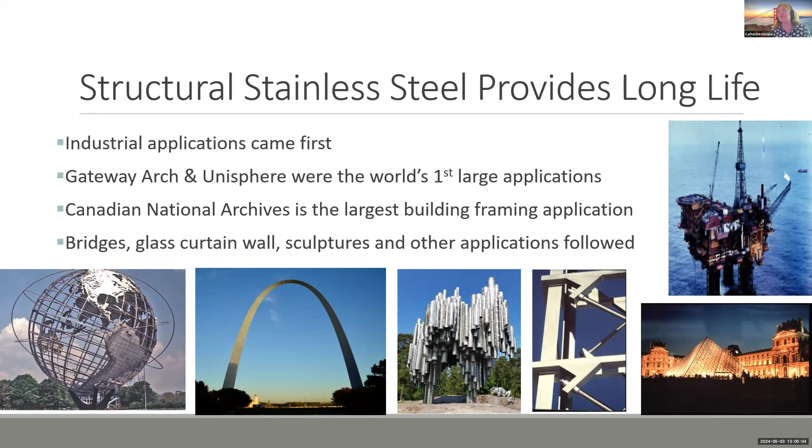Then the Canadian National Archives were built, and they were the largest building framing application in the world using structural stainless steel. Not that there aren't others—there have been many different applications for structural stainless steel. I'm showing a few, and they provide well-documented long life.

These are the documents we're talking about today. We started with Design Guide 27 from AISC. There's now a new version of it out. Once that was out, work began on the AISC specification for structural stainless steel in buildings and the Code of Standard Practice.

Simultaneously, the AISC/ASCE 8 committee was organized. I was involved in all of these things. I should mention that with ASCE 8, it had been 20 years since it was updated. It's been in the International Building Code since it was started, but it hadn't been touched. All of these now contain information about designing with duplex and highly alloyed austenitic stainless steels, in addition to the common stainless steels. Michael, as chair of AISC 313, is going to talk a bit more about that experience.

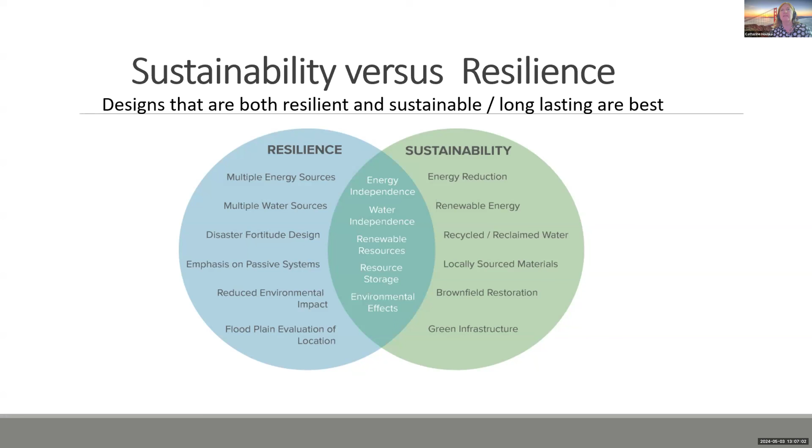I wanted to give you a bit of an overview as to why we're talking about sustainability and resilience. I'm very involved in ISO and ASTM sustainability and resilience standards. ASTM happens to be a bit ahead, but our government agencies and others around the world are all saying that we need both if we're going to reduce the carbon footprint and achieve our sustainability goals.

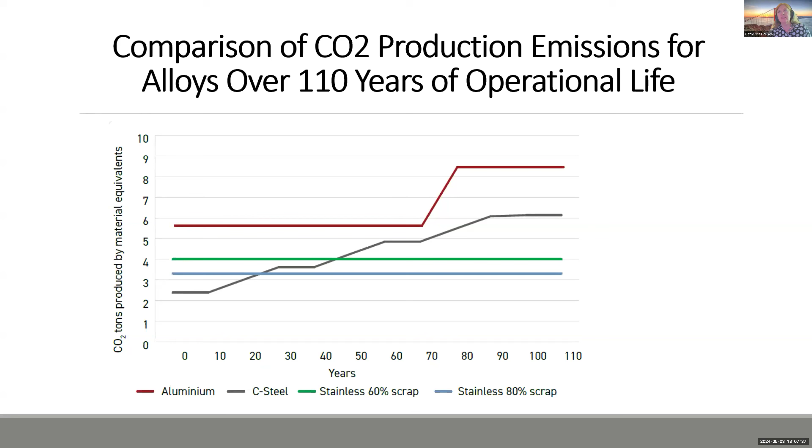If you look at 100-year projects or longer and consider material deterioration, replacement, and repair, there are significant differences between materials. When you have to do maintenance, there's an environmental impact. If you have replacements, there's an environmental impact, and all of that has to be considered in life cycle assessments. When it is, stainless steel has a clear advantage.

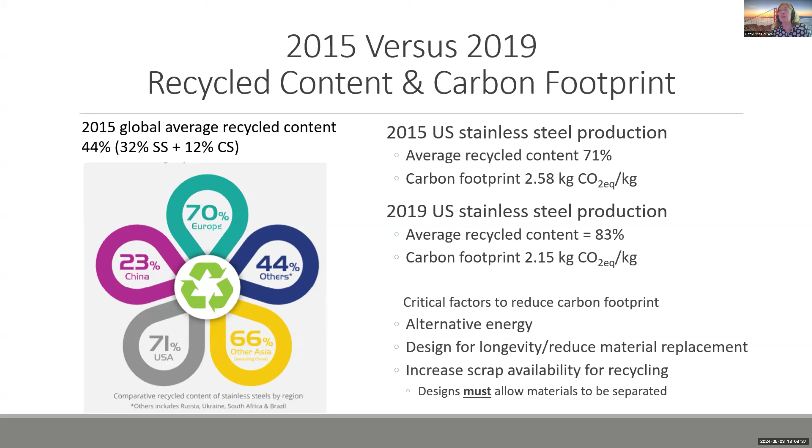It's also important to point out that there has been ongoing research globally on the recycled content of stainless steels. There's published data out there from World Stainless—I'm showing the 2015 global numbers. There is a difference between those numbers and the US-specific stainless steel production data. I've shown carbon footprint for 2015 versus 2019 to show you that there has been a significant reduction. The industry has worked very hard to reduce our carbon footprint. There are areas where we need more sources of alternative energy, for example, to help reduce it further, as well as improved scrap availability.

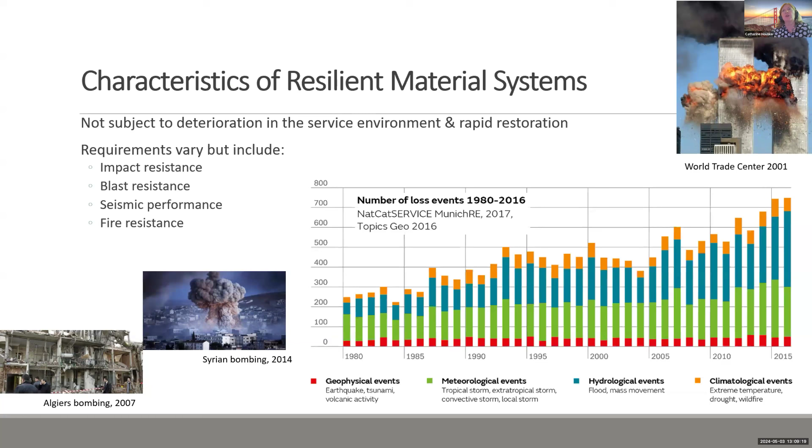We are talking about resilience tied in with sustainability, because the reality is that resilience loss events are increasing around the globe, whether human caused or natural, associated with global warming or otherwise. Stainless steel checks off all the boxes in terms of its impact and blast resistance, its energy absorption, which makes it ideal for seismic applications, and its fire resistance.

With that, I'm going to turn this over to Michael Mulhern, who's worked closely with me on AISC standards and other projects, to talk a bit about how we got here.

Thanks, Catherine. My name is Michael Mulhern. I'm president of TriPyramid Structures. For those of you who don't know us, we are a designer and manufacturer of custom architectural work around the world. Some of it's industrial, most of it's architectural. I'm going to very rapidly talk about why we have these new codes.

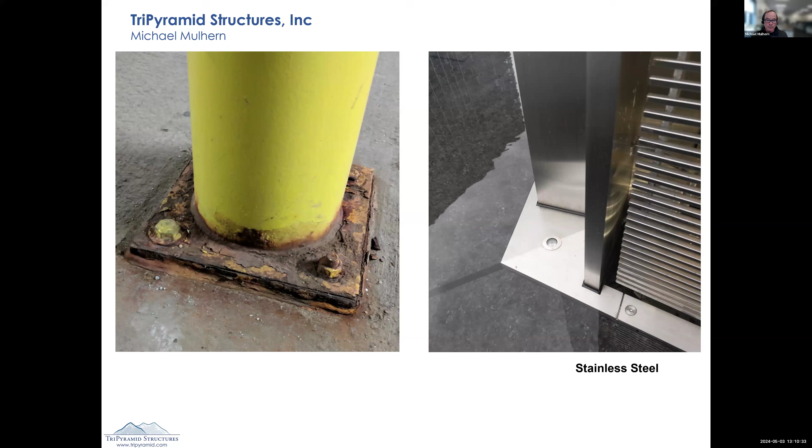The picture on the screen right now, we've all seen it in one form or another. But that column on the left, in my view, has failed. It is within about 200 yards of this tower that we built on the right-hand photograph. Now the column is somewhat older, but we know that we can do better than this in carbon steel. At the end of the day, carbon steel is going to rust and rot no matter how good a coating I put on it.

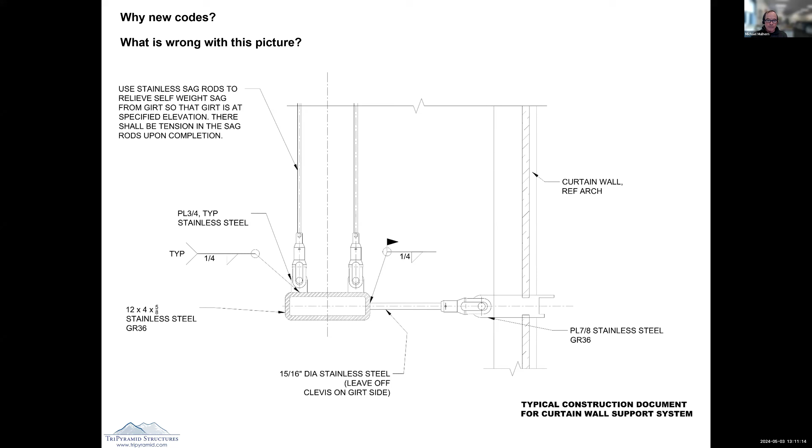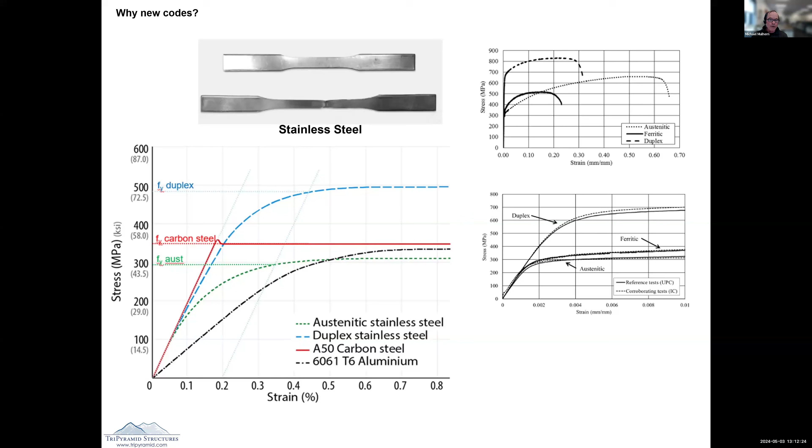Notice that the green line has got that big curve in it, and it isn't nearly as straight along what we call the elastic range. That's ductility. In the austenitic stainless steels, they're ductile — what does that mean? They stretch a lot, they move a lot. So it turns out that all these years we've been talking about using stainless steel with the same design parameters as carbon steel, it's wrong. It's wrong because the materials behave differently. That's why we have the new standards. A lot of it is the same, but some of it's real different, and some of the equations are real different.

So as a quick introduction — this is a talk I could give for many hours, so you're getting a very short version. First of all, what is stainless steel? It is not simply non-rusting steel. It is a different material.

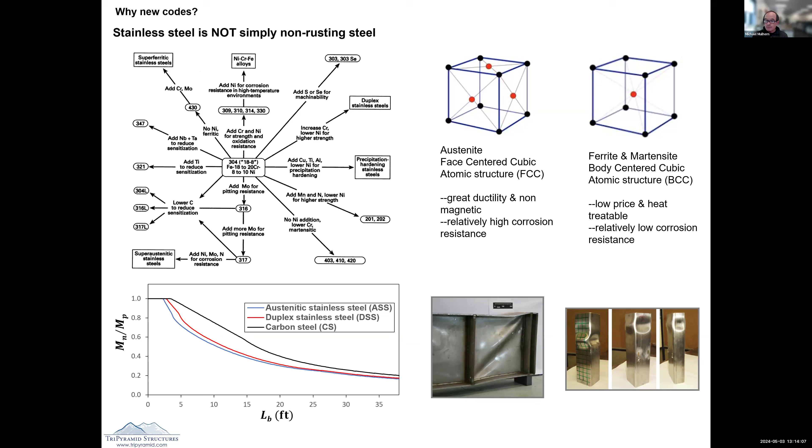This behavior that you see on the right-hand photographs is different than it is in carbon steel. The graph on the left illustrates that graphically. The black line shows how carbon steel behaves, and you'll see that the stainless steels, both the duplex, the red line, and the austenitic, are real different. So, a long way around, they're not the same.

And that's why we have new codes. The other piece of this new code network is that there are plus or minus 300 stainless steel alloy grades available commercially. The Outokumpu guide is, you know, it's thick, and there's all these tables about what stainless steels are available. For a designer, this is incredibly intimidating.

And what they don't tell you when you leave school is that most of these are not available to us. If you want to order a mill run, they're available, but for the most part there are very few stainless steel alloys that get used all the time and are available in a number of sizes, a number of sections.

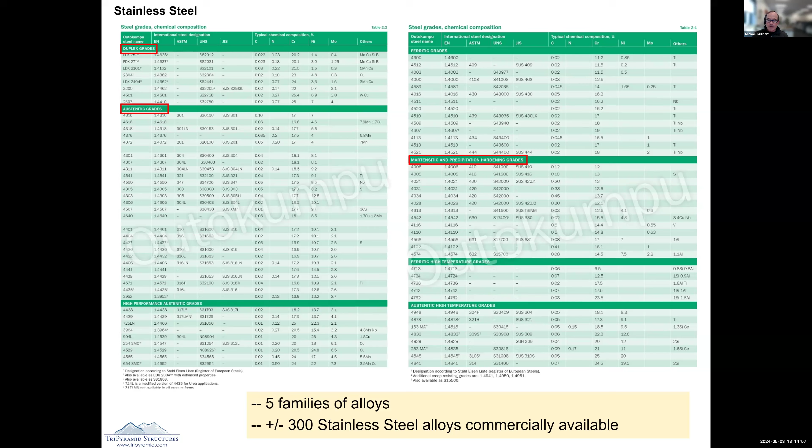So we've narrowed it down in the code committee so that you, as practitioners, have a list of things that are actually available, well, more or less available, and you have a potential of being able to put them in your project. Nothing is more frustrating to me as a fabricator than to have a drawing come along that says, I want to make this out of unobtainium stainless steel, and for me to have to spend the next three weeks explaining, no, I know what it says in the catalog, but we can't get it. So that's part of this effort.

To give you a little more insight into what Catherine was explaining a second ago about the code landscape right now: for those of you who work in carbon steel, the Bible in carbon steel is AISC 360, the specification for steel buildings. So in carbon, that's the book we use. It has a lot of formulas. It's very big. It's at the back of your steel construction manual.

As a family of design guides and as a family of codes, we also have a code of standard practice for steel buildings, and that tells the practitioners how we relate to each other, the structural engineer, what his job is, me as a fabricator, and there's a lot of rules in there.

We took those two documents and we morphed them into two new documents for stainless steel. AISC 370 is the specification. 313 is the code of standard practice. There's a lot of verbiage that's the same, and a lot of verbiage that's different.

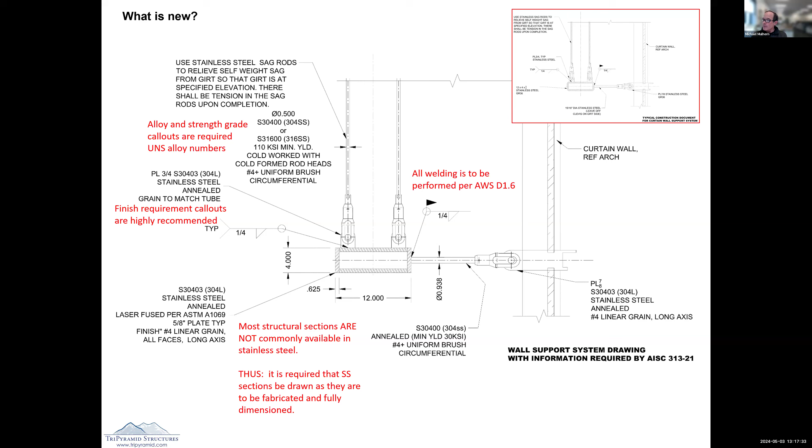It requires you to write what kind of stainless steel, what finish do you want, and in what temper, how are we going to supply it, how are we going to finish it.

One of the big new items, a giant new item, is that in stainless steel we do something different than in carbon steel. The first thing we are supposed to look at is corrosion resistance. Somebody's paying money to have this, either for resilience, for its long life, or for the aesthetic qualities of it. But the first element in stainless steel is: is it actually going to hold up in the environment we're putting it in? There's a whole lecture on that as well.

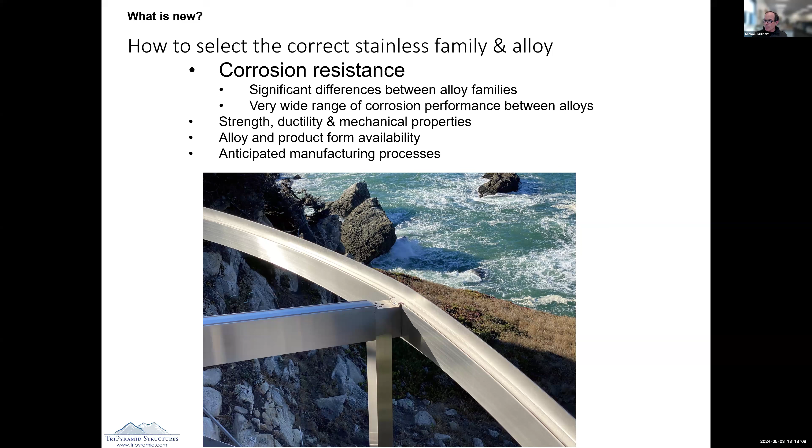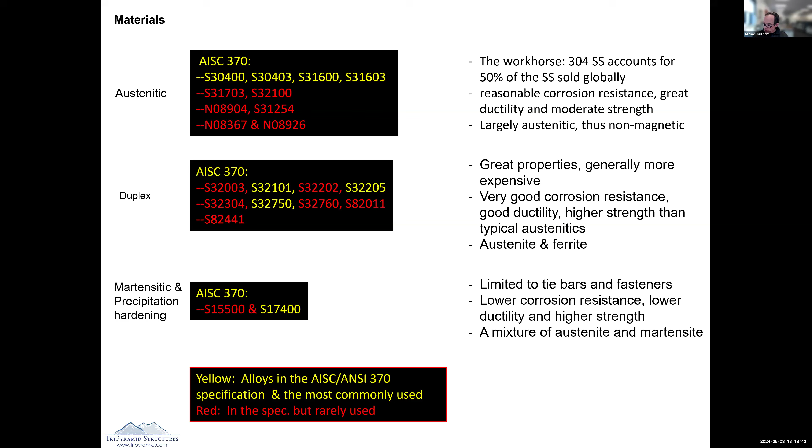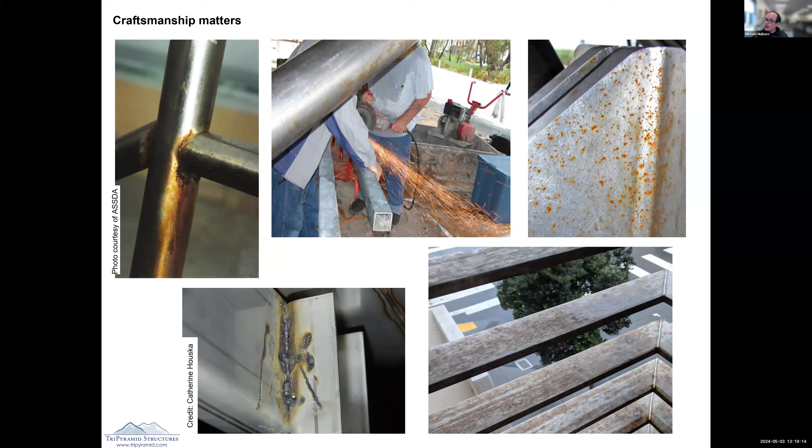That said, oh, my timer's going off, I'm done. It's not hard to work with, it's kind of fun. And that's what I have to say about why we're doing the standards. Now Richard and Ben can show you what we do. Thank you.

Catherine, you're muted. Thank you, Michael. Thank you, Michael.

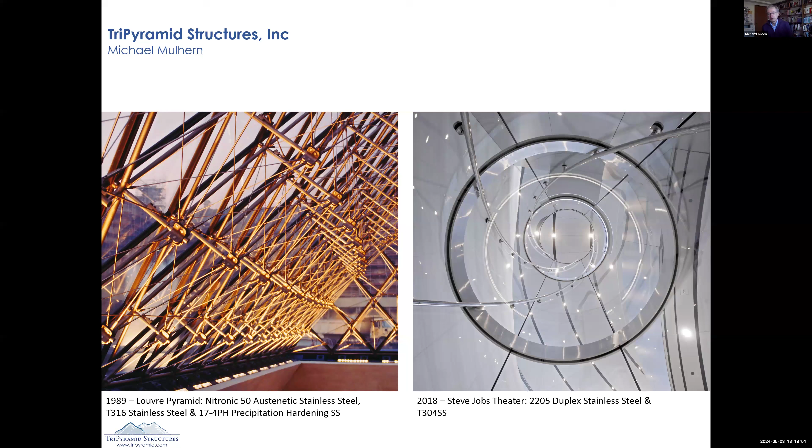Richard Green, I'm principal and founder of Green Facades. We specialize in doing facade systems on buildings, but some of those facade systems get pretty big. We enable architects through our engineering.

So I wanted to start off by perhaps challenging some of those ideas of what is big in stainless steel and small at the same time. This is the Suvarnabhumi Bangkok International Airport, and it's 360,000 square feet of a glass enclosure, all sitting on stainless steel tension trusses.

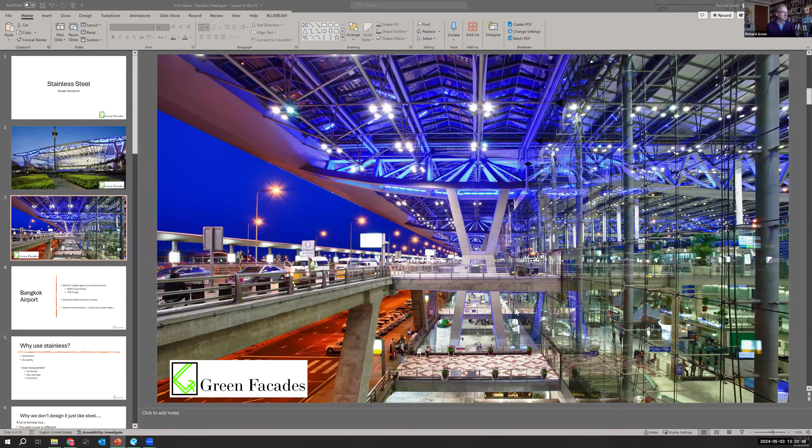Richard, we're not seeing your slides. We're not seeing slides yet. Oh, okay, hang on, one more button. Team, in, are we live? You see that now? I can't see. Oh, there we are. Yes, just make it full screen. We're looking good, we can see it. There we go, great. All right, start again. I had a green bar around mine. All right, Bangkok Airport.

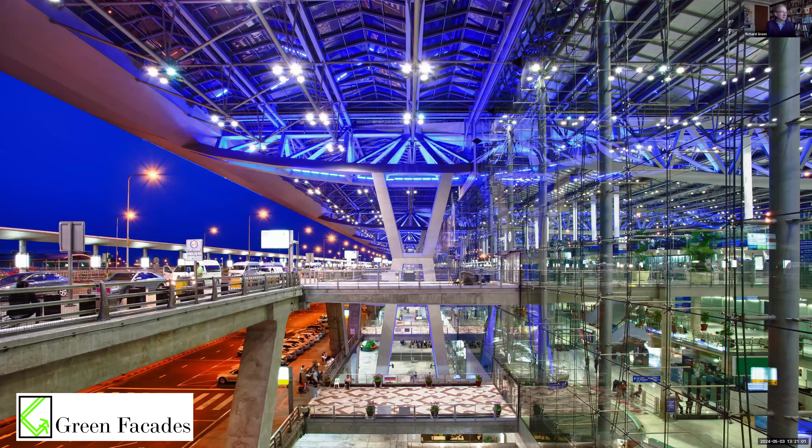So to give you an idea, this is 3,600 feet in perimeter, 100 feet tall, and it's all stainless steel tension trusses.

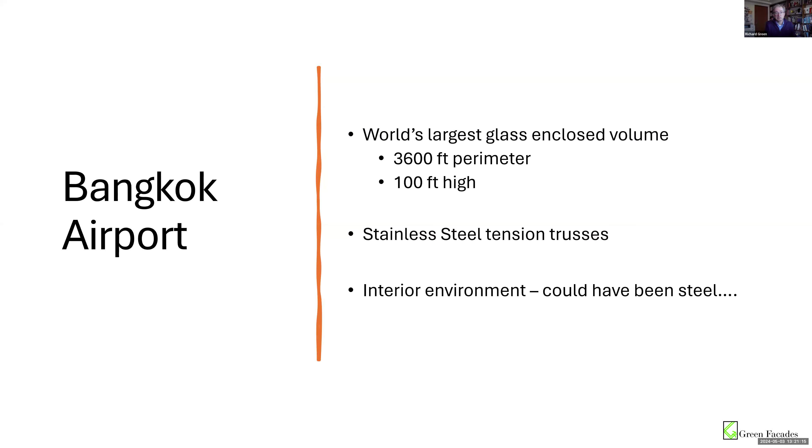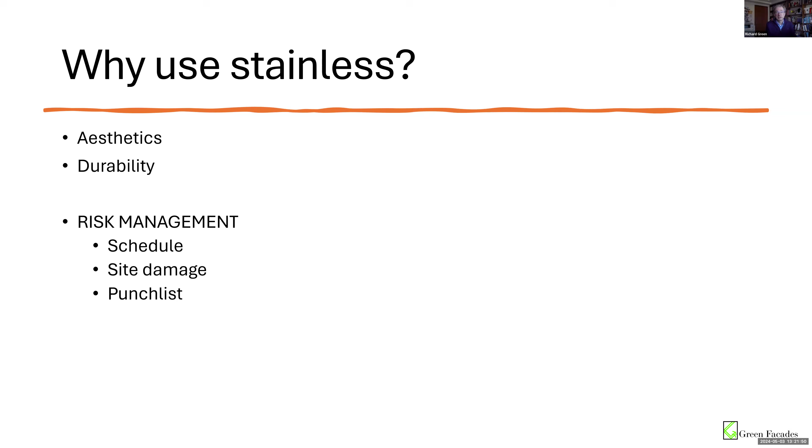Now, being all this truss work on the interior, we could have done this in steel, and it was actually originally specified in steel, but we changed it to stainless steel because we wanted to do this for risk management. We were very late in the schedule when I was brought onto the project, and we looked at it and said, if we make this out of steel, we've got to send it off to paintworks, and the paintworks get delivered on site near the glass, and you've got to start repainting things next to the glass. It was just a potential disaster from a delivery schedule point of view. So we normally look at this from a corrosion point of view, but in this case, there are actually external, practical and financial drivers towards why we're using stainless steel in this project.

So the question is, why don't we just design it like steel? It's familiar, it's kind of like steel, but the yield curve, as Michael showed, is quite different. The Young's modulus, as you interpret it, needs to be different, and it cold works. As you start applying work on this material, you start pushing up that curve, it gains that strength because of the dislocations that end up in the network. So rather than just going plastic in that horizontal plateau, it's actually getting stronger as you work it. And this really does change it.

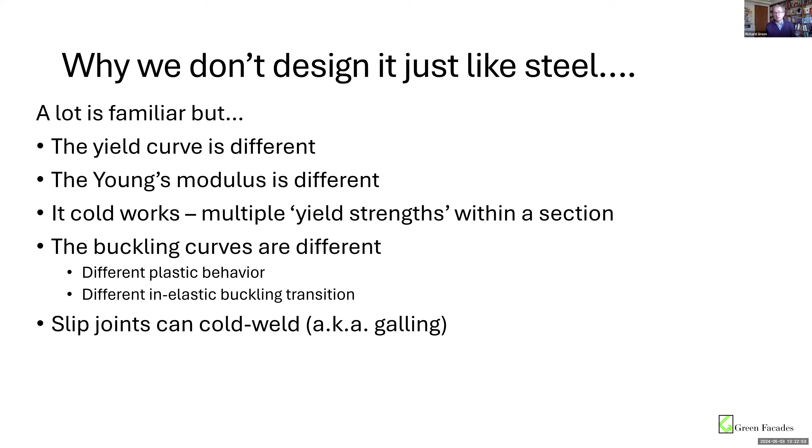There are also other practical aspects of this. If you're going to do slip joints, that self-healing surface that forms a new oxide on the surface - if you rub things together, this can be as simple as a nut on a bolt, and you take that oxide layer off, it will reform those oxide layers, and if it forms it together, you've effectively cold welded your material. There are considerations you need to be thinking about when detailing, which are different to what you do in steel.

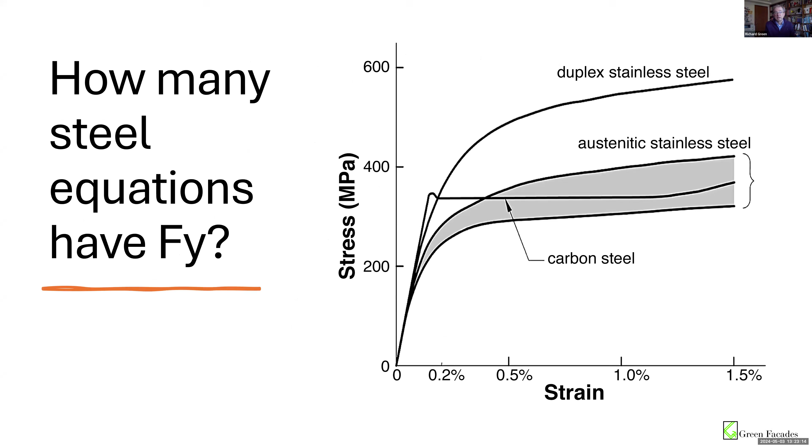So, how many formulas inside the steel design manual include FY? It's just about all of them. Somewhere in the process, everything designed comes around FY. And this idea of a yield plateau is an entirely different shape when we start talking about stainless steels.

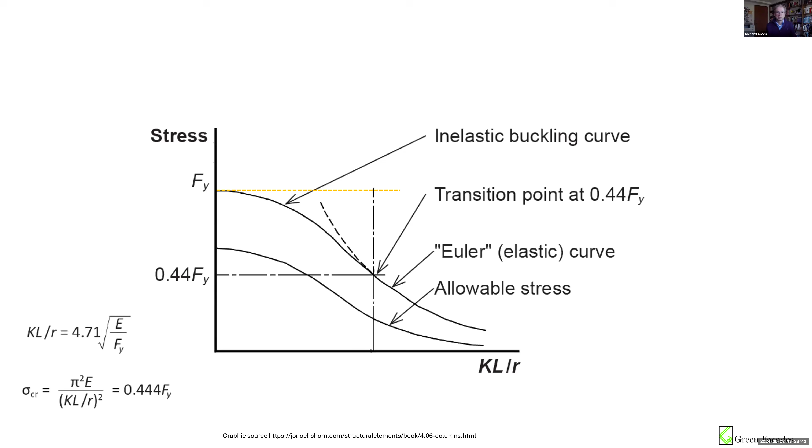So if we're looking at a common column arrangement, we can see we have the Euler buckling curve where it's fully elastic. We have the yield at the top, but the transition between the two is this inelastic buckling curve that allows for imperfections, some bending, some plastic movement. That's the area where the materials behave really differently.

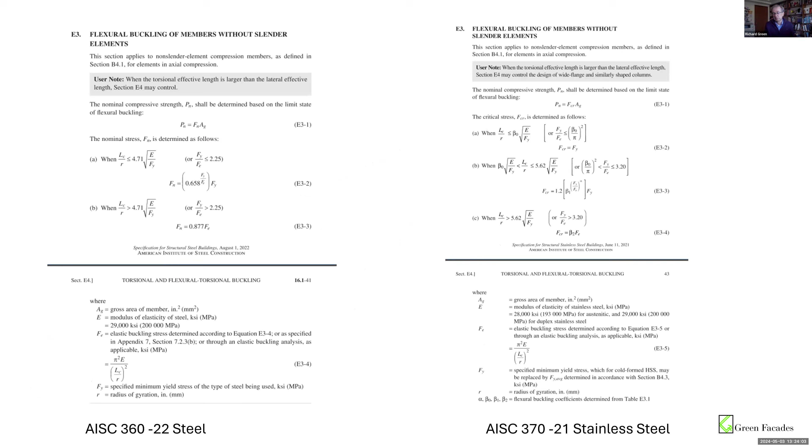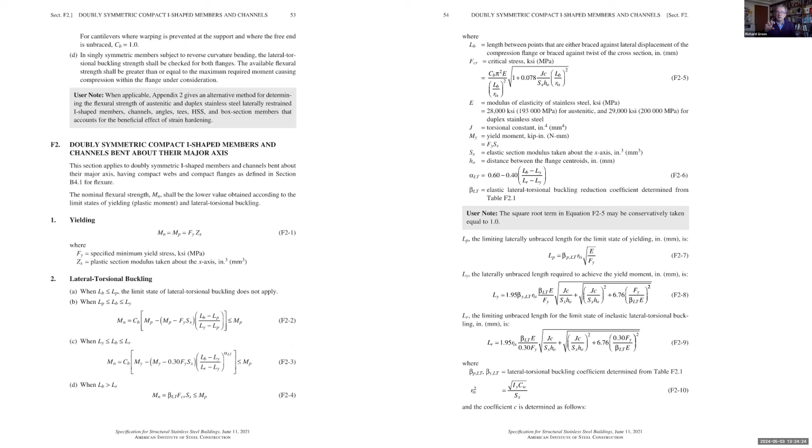If we look at them side by side, on the left is our very familiar steel code for columns. On the right we see something familiar in format, but it includes a number of additional parameters to allow us to fully utilize that space. Same as we transition with our shapes from elastic to plastic in beams, that inelastic region is really important. The formulas look more complicated, but really they are similar, with additional parameters which are material specific because the behavior of stainless steel is different.

So let's look at the other aspect of it. It's not just the material. The raw cost of the material does cost more, otherwise we'd use it all the time. But when you think about it in terms of finished cost versus raw cost, the amount of value add we have in there is very similar. And when we engineer things, that ratio of material cost to engineering cost to fabrication cost really does influence the techniques we use inside the way we build things.

If you look at bridges designed in the 1930s, labor was relatively cheap, so we see lots of lattice work and rivets. If we look at things now, labor's expensive, laser welders are cheap, so you see lots of welded thick plate girders. It's just an expression of this ratio between material cost, how much time we spend engineering it, and how much time we spend fabricating it.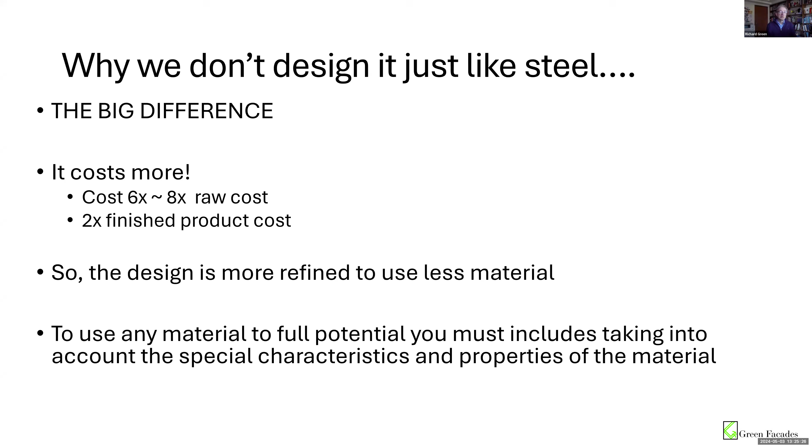One of the big differences with stainless steel is because it costs more, we tend to do more refined designs. Here's an example, again Bangkok Airport. It was originally designed as this big cast iron knuckle, which would have been cheap. But now that we look at stainless steel, the fabrication techniques available with people working with that material allow for a much more refined design.

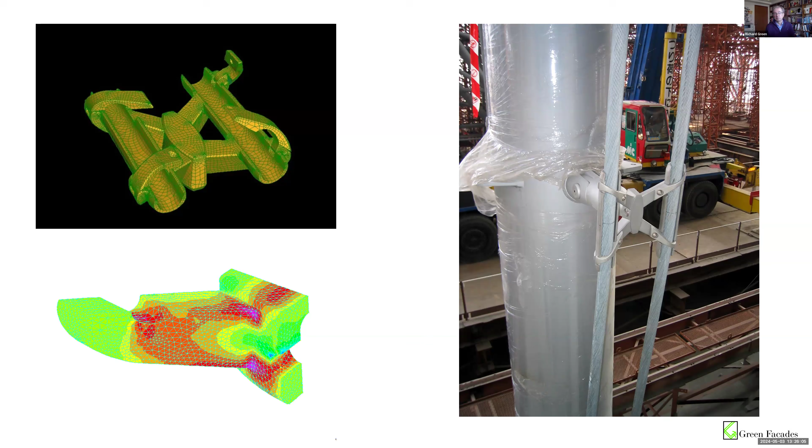We go through the process, we do elastic plastic analysis, we optimize the shape, and we end up with much less material. And when you have much less material with the fabrication cost, this ended up being very favorable considering the risk profile and the cost profile.

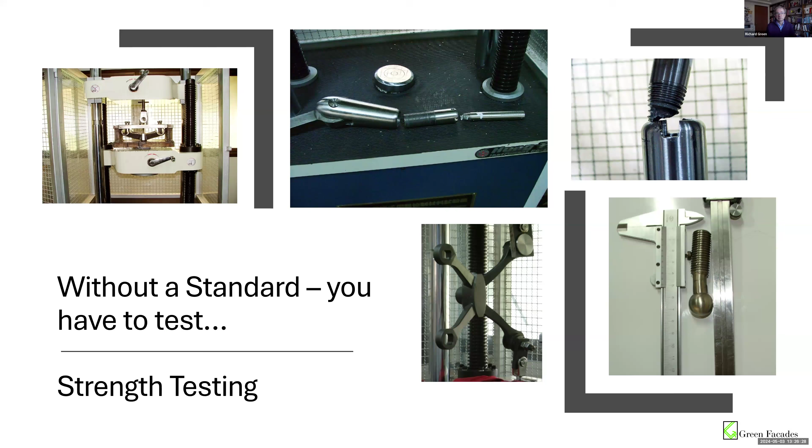Now, before you have a good material-specific standard, and Bangkok Airport existed before 370, we had to go through this process of justification, testing, engineering analysis, and judgment of what is appropriate. Now that we have standards in place, it allows us to streamline that much more efficiently and effectively.

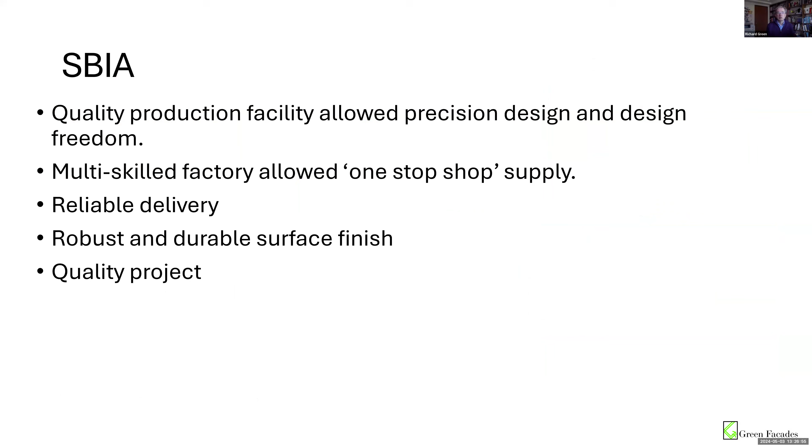So Bangkok Airport was delivered not just because we had this aspirational material or an aspirational aesthetic, but because it allowed us to have a one-stop shop with the fabrication. We didn't have to go from casting to machining to paint shop to risk of transportation to all of these other things. The overall risk analysis really made the project work to give us a quality project.

And I think it's the largest glass enclosed volume anywhere in the world. It's basically the Boeing factory with a glass wall on it. It's an amazing use of stainless steel.

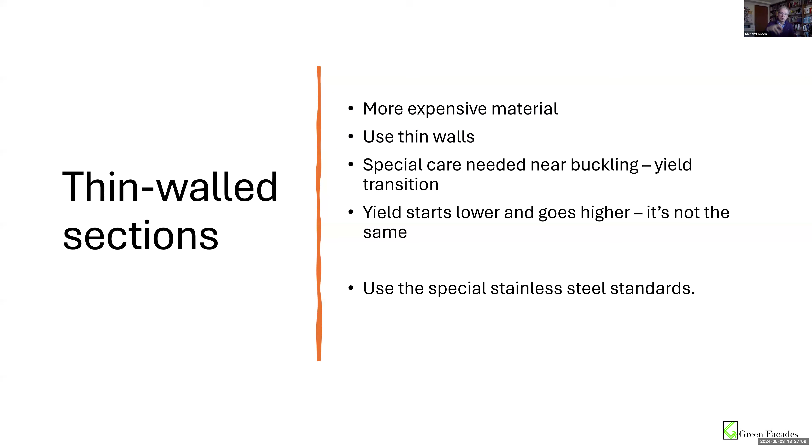But when we start looking at this, more expensive materials mean thinner walls. When using thinner walls, you're more interested in the buckling profile, more interested in what's happening in that inelastic region. This is why the material specification becomes so important, because that's where the materials behave differently. And this is where you get the efficiency of design, and this is what these standards allow you to do.

So with standards, we spend more time optimizing, more time getting special shapes. We're not just using rectangular sections with even profiles on all sides, we're optimizing things towards where we need the metal, where we get the benefit out of it, how we get that cost benefit. We circulate collective expert opinion on these things so that when you start designing, you're starting with something which is a roadmap that says get yourself in the right place. Then you can get expert opinion on other things, but you're able to design and not make structural mistakes.

It facilitates specification. When you're an architect or designer, how do you get what you're expecting? If you're specifying to standards, you don't have to write the manual yourself. And when you're doing a special structure and the building department goes, what is this thing you're designing with this material I'm unfamiliar with, you can say, here it is, all these smart expert people have written this book, and I'm following it. This really helps you get through building departments and avoid them saying please do custom testing, which is very expensive. So I recommend all these standards to you.

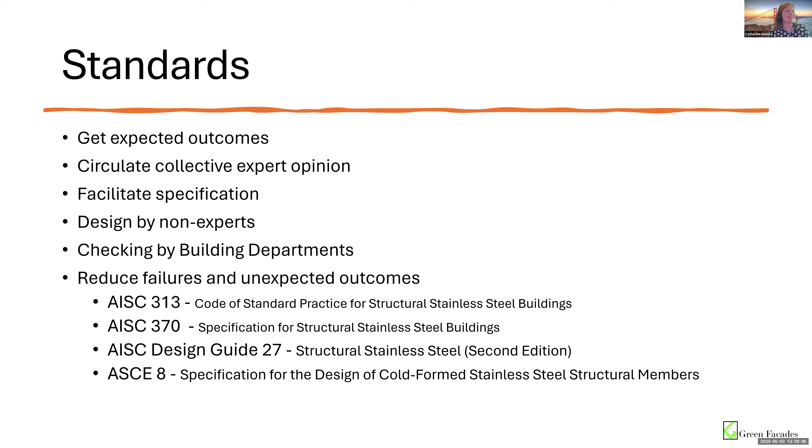Mattia Del Giacco from Stainless Structures. We are a manufacturer of laser welded stainless steel profiles and shapes. As a starting point, I'd like to mention that when designing with stainless steel, it's very important to reference the right standard. From this point of view, the new ASTM A484, on which Catherine did an incredible job to widen the scope, covers most of what you need when it comes to general requirements for stainless steel bars, billet, and forgings. In particular, you'll find very interesting the tables covering hot rolled and extruded shapes up to 8 inches in size, since that's the typical range of productivity for those sections.

You will not find in the USA, Europe, or even Asia any hot rolling or extruding facility for stainless steel that can go wider than 8 inches, or maximum 10 inches sometimes. When you go to bigger sections, ASTM A484 is going to point you to A1069. A1069 has been the ASTM standard of reference for the last couple of decades regarding laser welded sections. It's very important to specify the standards because they don't only mention chemical and mechanical properties, but also the qualification routes and dimensional tolerances.

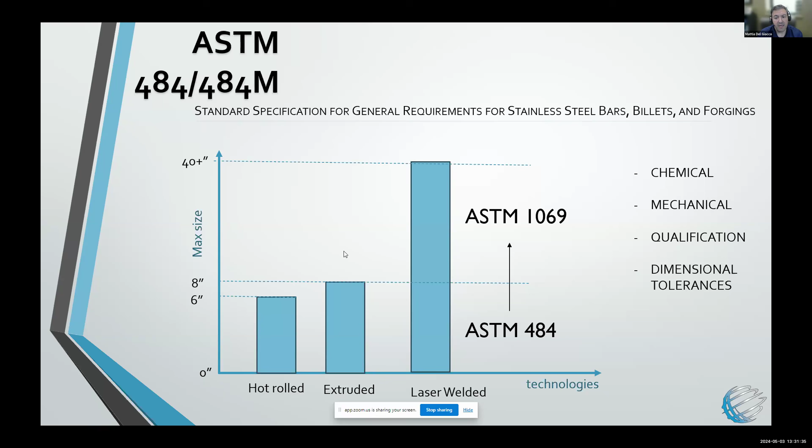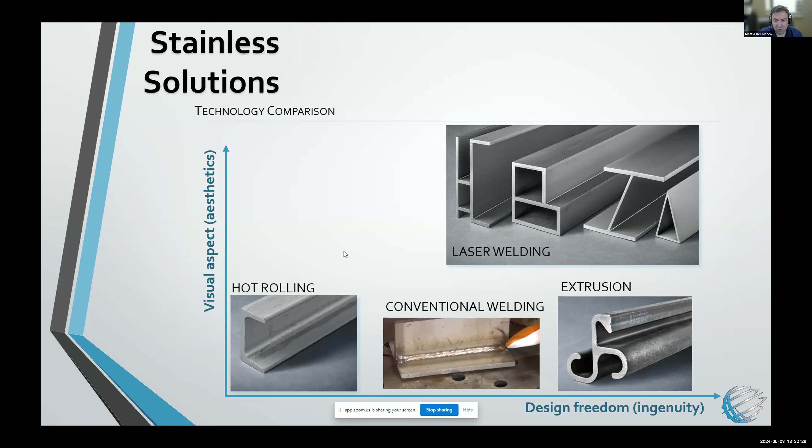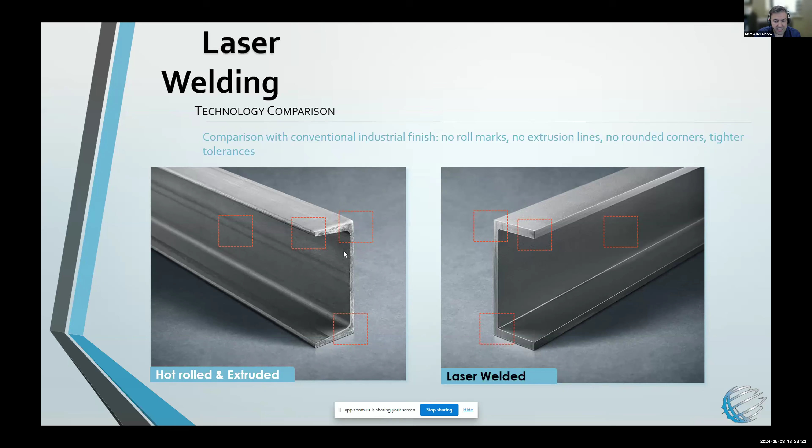In this slide, you can see a comparison between two channels. On the left, you have a hot rolled or extruded channel. On the right, you have a laser welded channel. The main differences are highlighted by the orange dashed areas. You can see, for example, the hot roll channel has tapered flanges and round edges versus a laser welded channel with crisply sharp corners and straight edges. In addition, you can see the surface is different. The hot rolling or extruded process usually has rolling marks or superficial defects, just the nature of the technology and process, while laser welded shapes can give you a pristine, clean, bead blasted surface.

Just to give you an idea of how laser welding compares to conventional welding, laser welding can offer you a monolithic structure characterized by the same mechanical and chemical properties as the parent material used. This is very beneficial to design engineers because you don't need to use a welding correcting factor, since the material is now a monolithic structure. So from a mechanical standpoint, it's equivalent to an extruded shape.

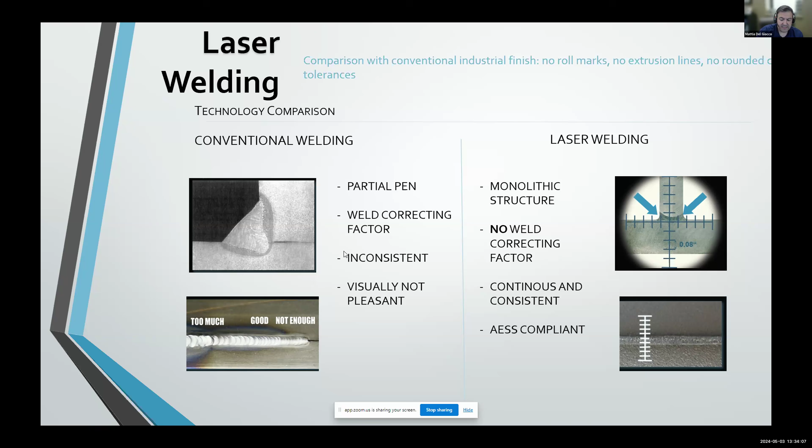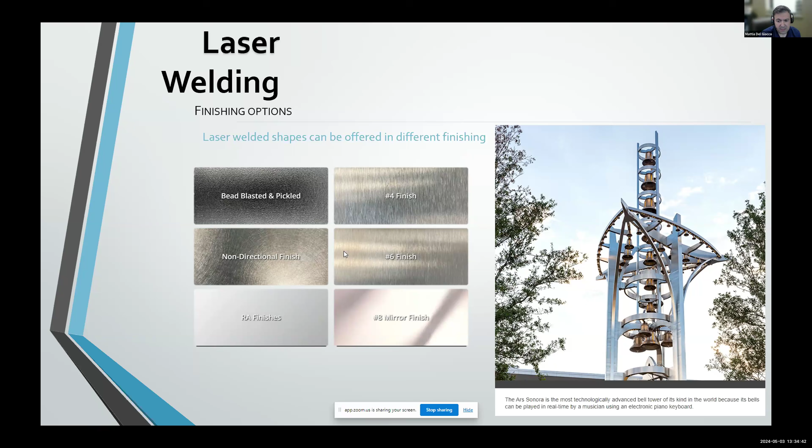However, you gain flexibility of design and surface appearance, typically conforming to the AISC guidelines for architecturally exposed steel structures. This superficial finishing also adds additional finishing options, such as polishing. There's number 4 finish, non-directional, number 6 finish, a mirror finish. A good example is a recent project we did for the Ars Sonora at UT Dallas, where laser welded sections, polished number 6, were used for their bell tower.

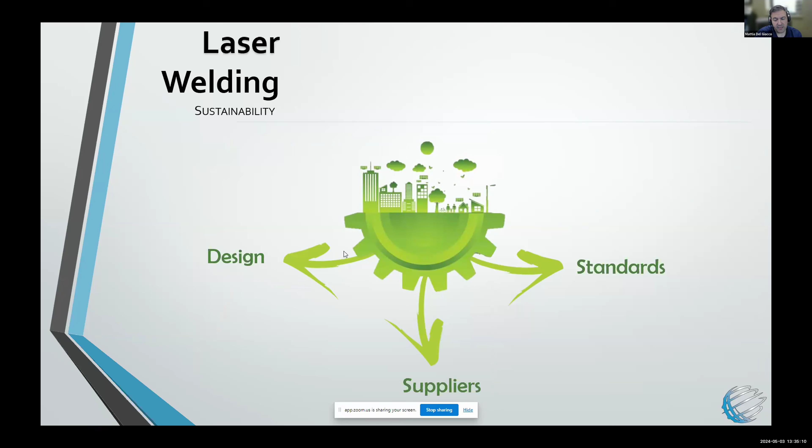As designers, engineers, or architects, you can stress the importance of sustainability and resilience of your choices in different ways: with the design, choosing the right suppliers, and selecting or specifying the right standards. When we talk about design, for example, there is a way to save material. If you go for a more flexible technology such as laser welding, you can specify different wall thicknesses. In this way, you avoid over-engineering and save material.

On the other side, you can also try to create sections with certain functionalities. For example, you can have some area of your section, maybe the one exposed to a more aggressive environment, with a higher grade, and another area of the section using lower grades.

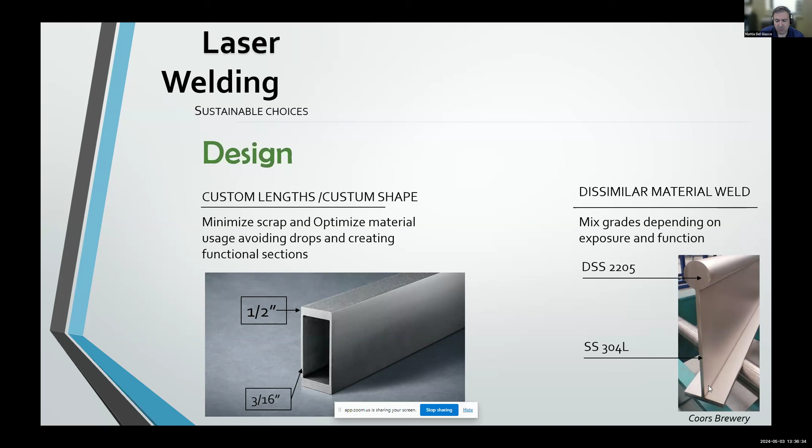A good example of that is this product we manufactured for the Coors Miller Brewery, where we could use a duplex stainless steel 2205 rail welded to a T section in 304 steel. In this way, the customer could benefit from a cheaper solution for the T-shape with 304 stainless steel, whereas it could have a higher grade 2205 stainless steel for the round bar rail, where it needed higher corrosion resistance and mechanical properties.

As I mentioned, using the right standards is very important, also from a sustainability and resilience standpoint. In particular, if you use the ASTM A1069 or ASTM A1127 standards, these are completely aligned to the carbon steel equivalents. So we have tolerances, mechanical testing requirements, and inspection requirements, and in this particular example of the 1069, you also have mechanical properties that are higher than the one specified for the raw material.

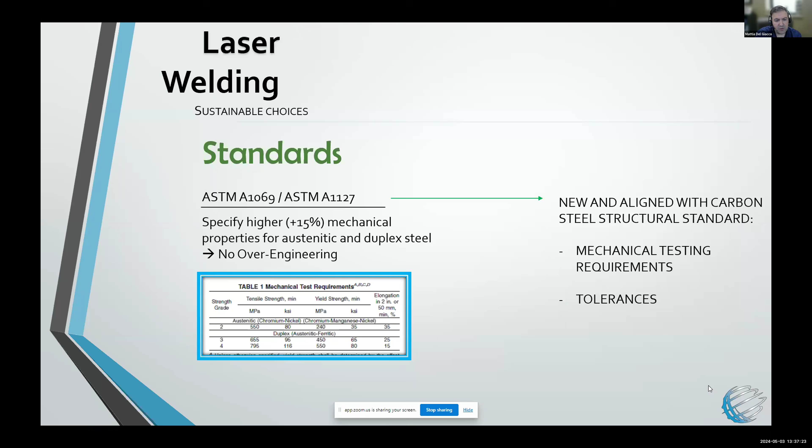Typically about 15% higher, which also gives you a good benefit in terms of avoiding over-engineering. Last but not least, from the point of view of sustainability, is the selection of the right supplier. There are many suppliers who are deeply involved in sustainable projects and sustainable cycles, and Stainless Structurals for sure belongs to this group.

Today, we can go on the market with what we define as green structurals, because we can produce our laser welded shapes using only clean energy. Thanks to our 4,000-panel solar system, which is about the size of 2 football fields, we can now go to market starting from highly recycled raw material, such as that provided by Outokumpu or North American Stainless Steel, which can have recycled content up to 85% or even more.

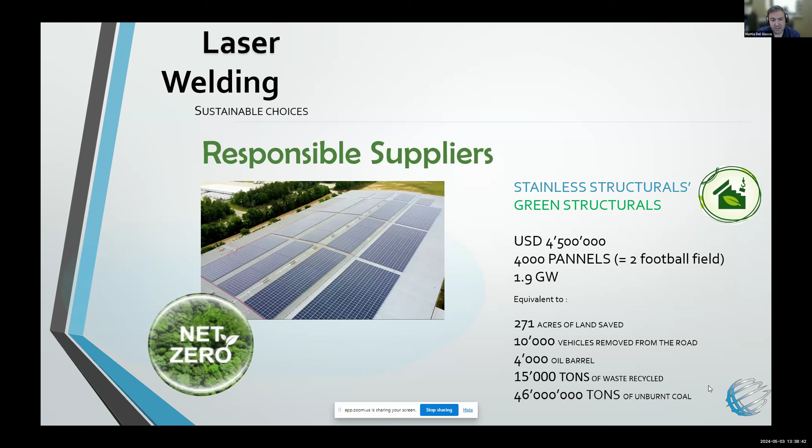Using green energy, we can really have a near net zero carbon footprint for structurals, and that's very important if you want to have structures and designs characterized by sustainability and resilience.

I can now give the word to Ben. Yes, and I did want to mention, since with some of the projects Ben's going to talk about, that Matt is also affiliated with Montanstahl, since you're talking about 7 World Trade Center. 7 World Trade. Absolutely. Hello, all.

Ben Caldwell. I'm an architect and specification writer at Skidmore, Owings & Merrill. And I get the fun part. Thank you, everybody, for the standards and for the work you do making beautiful buildings. And we all get to enjoy them in our city.

Tower 7. This was the first tower after 9/11. And it was very important that the first tower after 9/11 become a beautiful, crisp, and permanent looking building, so structural stainless steel was a very natural choice.

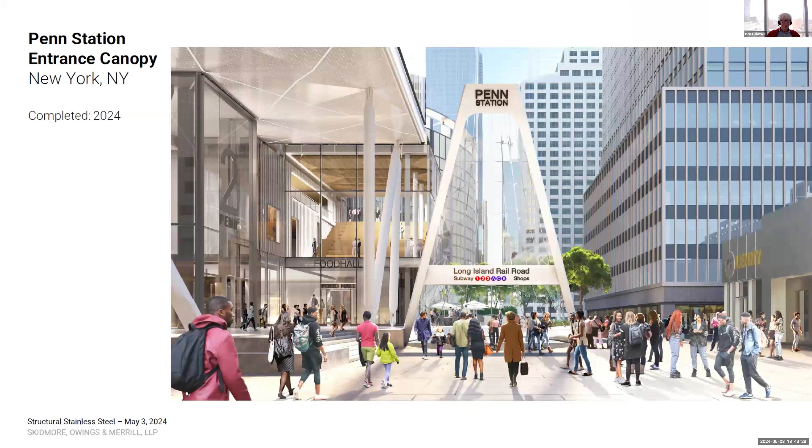We are now in 2024. We've just completed this entrance canopy to Penn Station, to the Long Island Railroad. You no longer have to walk down some dark stairs underneath Madison Square Garden. So awful lot like the rendering. So here's the rendering for what this was going to look like, and this is how it turned out.

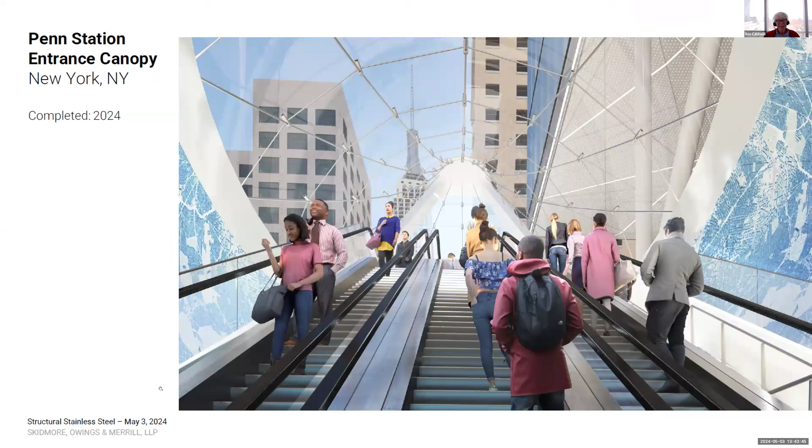Again, thank you, stainless steel. Rendering, and then the real thing—I think the real thing is actually better than the rendering. This is a beautiful stainless steel cable net structure that we've got over the canopy.

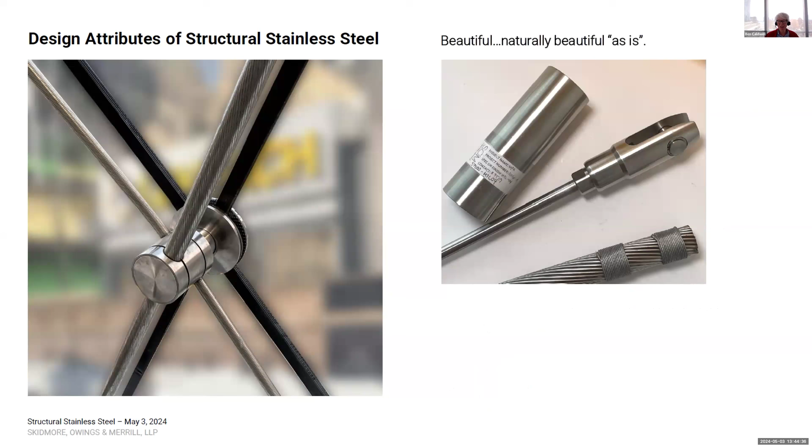So a quick overview of the design attributes of structural stainless steel. We've talked about it a bit already, but it is naturally beautiful as is. Matteo and I have talked about this already—I don't think there are very few things where we actually keep samples on our desk because they're just so beautiful. But these are stainless steel connections and products I keep on my desk. They're just so beautiful.

And the sustainability aspect that we've talked about is that it's a beautiful, hard, low maintenance surface with a very low risk of damage. We have no additional finishes needed. There's none of the VOC concerns of paint, none of the VOC concerns of anodizing. Any refinishing that is required is just elbow grease—that's very low VOC.

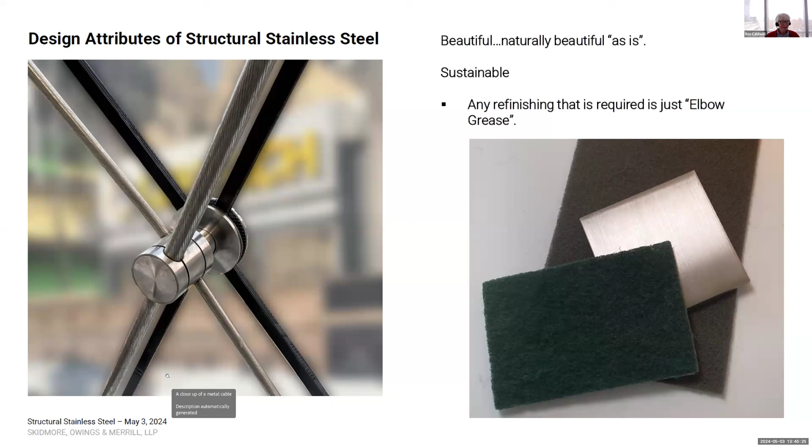So I actually keep a Scotch-Brite pad and a little piece of stainless steel on my desk, so that when we're talking about how to refinish stainless steel, we can refinish it very easily. And I love that about stainless steel. So after refinishing, it's still stainless steel. We obviously have to use the right alloy to make it truly stainless, but it is also salt resistant, and we'll call it urban liquid resistant.

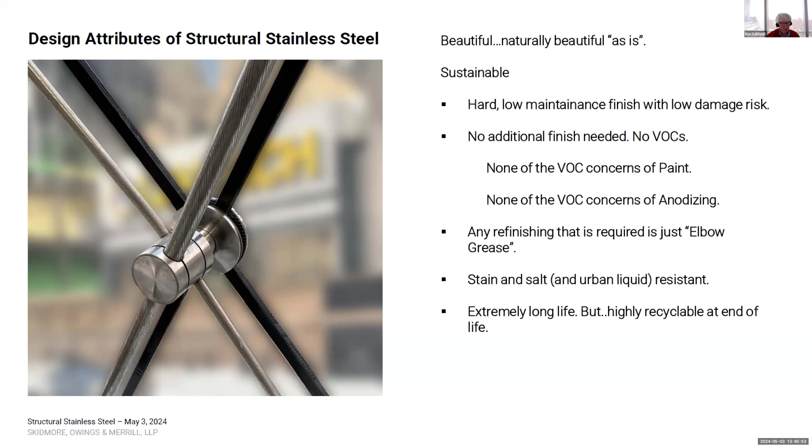Next, an extremely long life—we're now talking about 200-year buildings. And so stainless steel is just such a nice choice for it. Structural stainless steel is highly recyclable at the end of its life eventually.

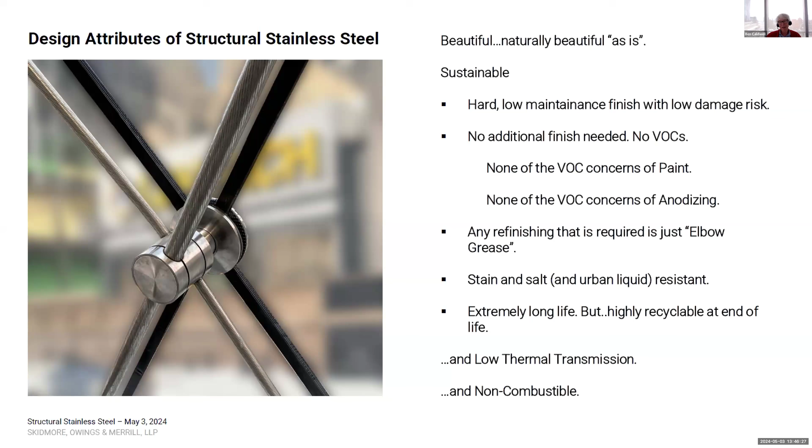We're also using it in smaller applications, but it has a lower thermal transmission than aluminum as an example, so we're often using it in lieu of other materials. And as Catherine's already pointed out, non-combustible—we like non-combustible. Thank you.